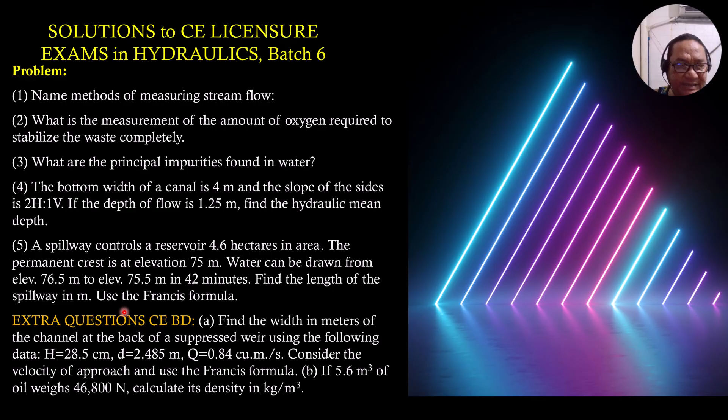Here is a video in hydraulics, and these are past licensure exam problems in civil engineering, and the problems are in hydraulics. I hope that through this video your preparations for your respective board exams, especially civil engineering, will be that intense and great so that you can pass your licensure exams. And in each part, I always have this extra problem for you to supposedly solve, but I still present the solution to this.

So here is the first question. Name methods of measuring stream flow. So there are many ways, but the most common ones are using the weir formulas. We have using the Price current meter from your hydrographic survey in surveying, Price current meter, and using weir formulas and open channel discharge formulas. So Price current meter, weir formulas, and open channel formulas.

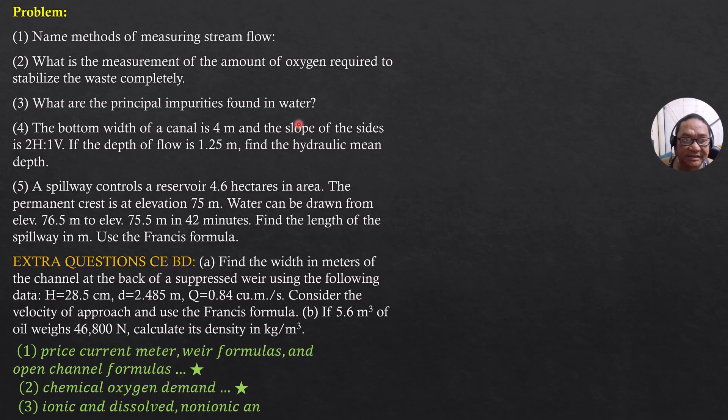Then number two, what is the measurement of the amount of oxygen required to stabilize the waste completely? We call it chemical oxygen demand. Then number three, what are the principal impurities found in water? These are ionic and dissolved, non-ionic and dissolved, and gases. This question might again come out in your board exam. This topic would be in water resource engineering or hydrology.

These questions here. Then number four, the bottom width of a canal is 4 meters and the slope of the sides is 2 horizontal to 1 vertical. If the depth of flow is 1.25 meter, find the hydraulic mean depth. The question was really find the hydraulic radius, and I used the alternate term because you might encounter this and may not recognize that hydraulic mean depth is also the hydraulic radius.

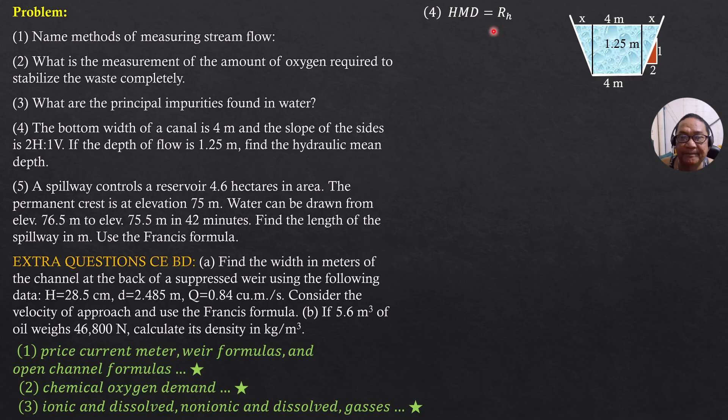Then for the solution, let's have the cross section. Remember the hydraulic mean depth is also hydraulic radius. So it is area over wetted perimeter. So from the figure, this is the bottom width of the base, which is 4. Slope is 2 horizontal to 1 vertical, and I'll call this part X. That's also X. The depth of flow is 1.25 meter. So therefore, by similar triangles, X is to 2 as 1.25 is to 1.

That's the definition of hydraulic mean depth or hydraulic radius. So X is to 2 as 1.25 is to 1. So X is 2.5 meters. The top width therefore is 4 plus 2 times 2.5, so 9 meters. Area is one half of 9 plus 4 times 1.25. So it is 8.125 square meters.

The wetted perimeter is 4 plus the length of the slanted sides, which is square root of x squared plus 1.25 squared. So 4 plus 2 times square root of 2.5 squared plus 1.25 squared. So it is 9.59 meters. We can now compute the hydraulic radius: area 8.125 over wetted perimeter 9.590. So the hydraulic radius is 0.8472 meters.

Number 5, a spillway controls a reservoir 4.6 hectares in area. The permanent crest is at elevation 75 meters. Water can be drawn from elevation 76.5 meters to elevation 75.5 meters in 42 minutes. So find the length of the spillway in meters. Use the Francis formula. This is assumed to be a suppressed rectangular weir. So suppressed weir using the Francis formula is Q = 1.84 L H^(3/2).

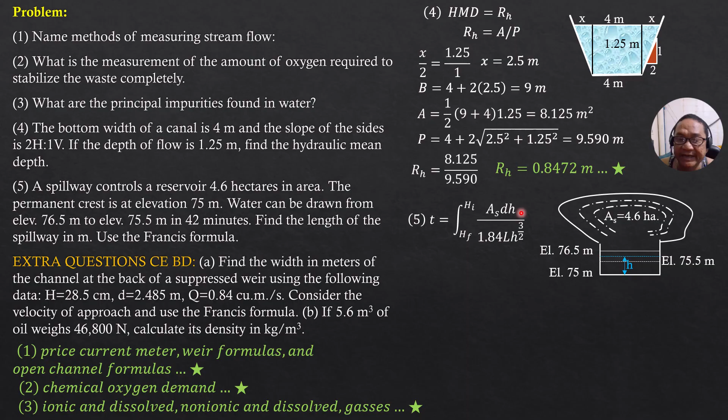1.84 L constant. So we'll just evaluate the integral of H to the three halves, which is H to the negative three halves rather, which is H to the negative 1/2 over negative 1/2. So that's negative 2 area S. Then H to the negative 1/2 from HF to HI over 1.84 L. So substituting limits. So time is 42 minutes. We convert that to seconds.

So 42 times 60 then equals negative 2 times 46,000 quantity 1.5 to the negative 0.5 because the initial head from the crest is 76.5 minus 75, so 1.5. That's the initial head. The final head when the water level drops to elevation 75.5 is 75.5 minus 75, so 0.5. So minus 0.5 to the negative 0.5 all over 1.84 L. So using your calculator, we can now solve for L, and L is equal to 11.86 meters.

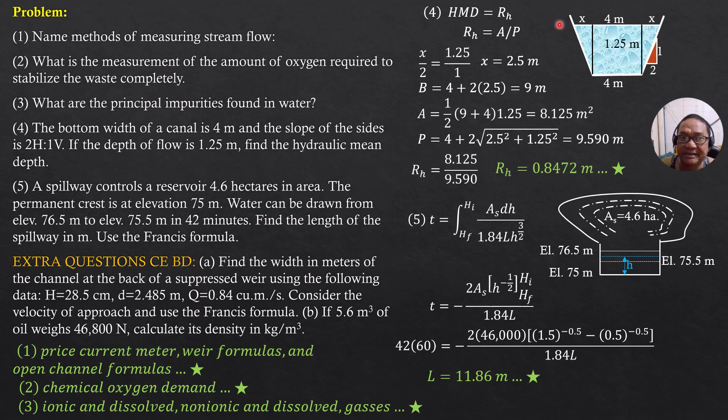So for the extra questions or problems, these are also past civil engineer licensure board exams. So part A, find the width in meters of the channel at the back of a suppressed weir using the following data. Big H, 28.5 centimeters, depth 2.4, depth of water in the channel 2.485 meters, Q 0.84 cubic meters per second. Consider the velocity of approach and use the Francis formula. Then part B, if 5.6 cubic meters of oil weighs 46,800 newtons, calculate its density in kilogram per cubic meter.

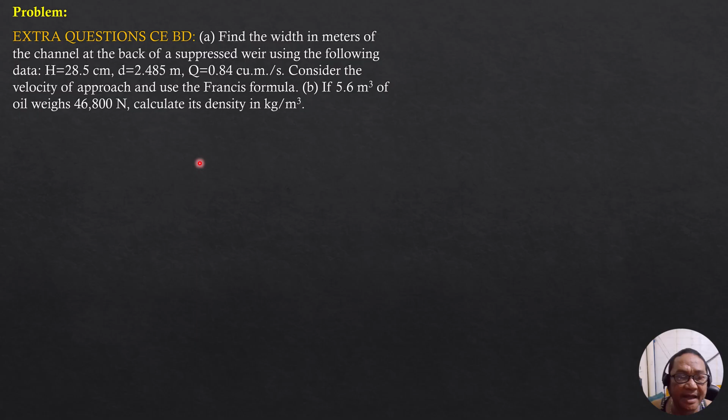So for the first part, the discharge formula considering velocity of approach is Q equals, using Francis formula, 1.84 L quantity big head H plus h sub V to the 3 halves minus h sub V to the 3 halves, where h sub V is equal to the velocity head of flow, which is V sub A, velocity of approach, square over 2G. Now, what is V sub A?

V sub A is discharge over the weir or in the channel, because by continuity equation, the discharge is the same, divided by the cross-sectional area of the channel. The cross-sectional area of the channel is the base width of the channel times the depth of flow, 2.485. So V sub A equals 0.84 divided by BD. B is also the length of the crest because

the weir is suppressed. When the weir is suppressed, there's no contraction involved. So that means the length of the crest of the weir is also the width of the open channel. So substitute B equals L. So V sub A equals 0.84 divided by L times 2.485. So substitute here. So h sub V equals 0.84 over 2.485 L quantity square over 19.62. Simplifying, that's 0.005824 over L square. We then substitute into that formula there.

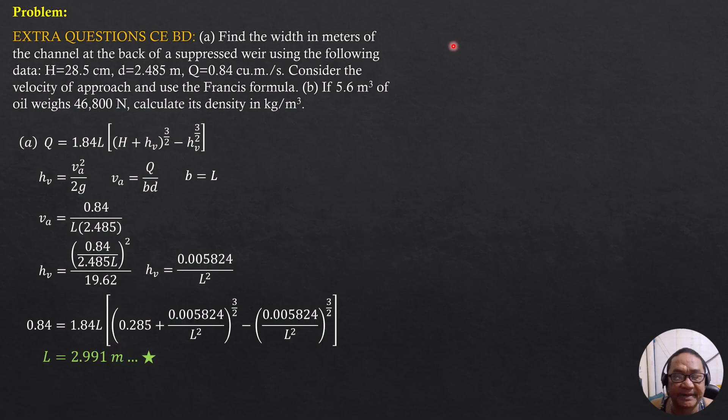Then, if 5.6 cubic meters of oil weighs 46,800 newtons, calculate its density. Weight is equal to mass times G, and mass is density times volume. Density in kilogram per cubic meter times volume. The volume is given. So weight equals mg, and mass is density times volume, then times G. G is 9.81, of course. So density unknown, weight is 46,800, volume is known, then G is a constant, 9.81 meters per second squared, then we can compute the density.

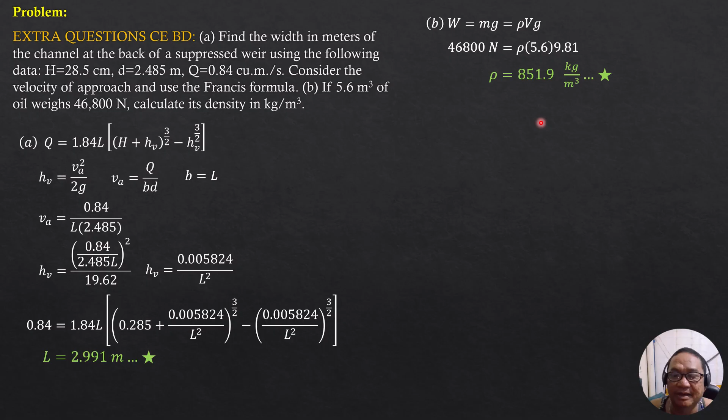So 46,800 newtons equals density times volume times G. Solving for density, density is 851.9 kilograms per cubic meter. So that's it for this video.